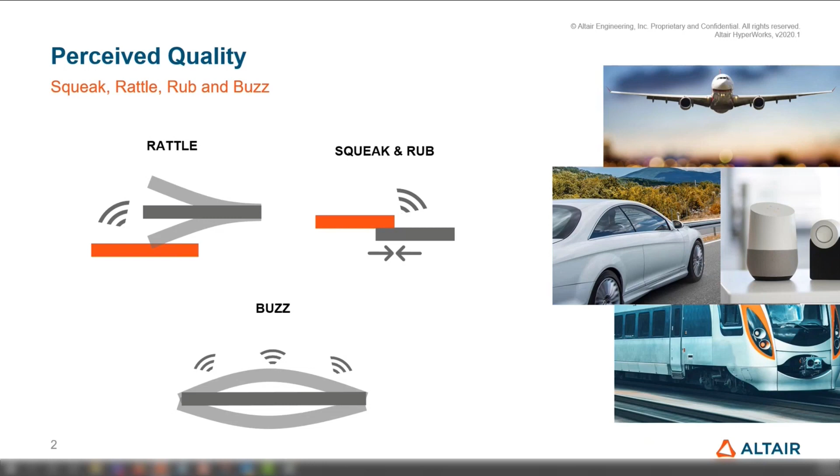Traditionally, these issues are fixed based on iterative physical testing, which is often done at later phases of product development. As you can imagine, it ends up in very expensive reworks and quick fixes at the production stage. Through simulation, we can eliminate most of these issues even before the first prototype is built. Altair's solution for this is well established and has over the years become industry standard for squeak and rattle simulation.

So squeak and rattle issues are, as we've seen, a responsibility of many at every stage of the vehicle or product development cycle, even at the early design stage. Here we provide the tools and technology for the first stakeholders, designers, allowing them to evaluate the risks quickly and iteratively. This is achieved using CAD-based simulation combined with a material compatibility analysis using the Ziegler stick-slip material database, which I'll get to a little bit more later in the presentation.

As soon as the first finite element model is available, we can then add on and perform a structural squeak and rattle risk analysis, which allows us to identify the issues utilizing solutions like SnRD, leveraging the industry standard E-line method.

Here we also leverage structural optimization in different ways throughout the entire development process to guide us in the right direction on how to actually solve the issues that we find.

One can also include variabilities in the model through a DOE and stochastic study, and this allows us to examine how the squeak and rattle risk will directly be affected by variations caused by manufacturing, external effects, or wear.

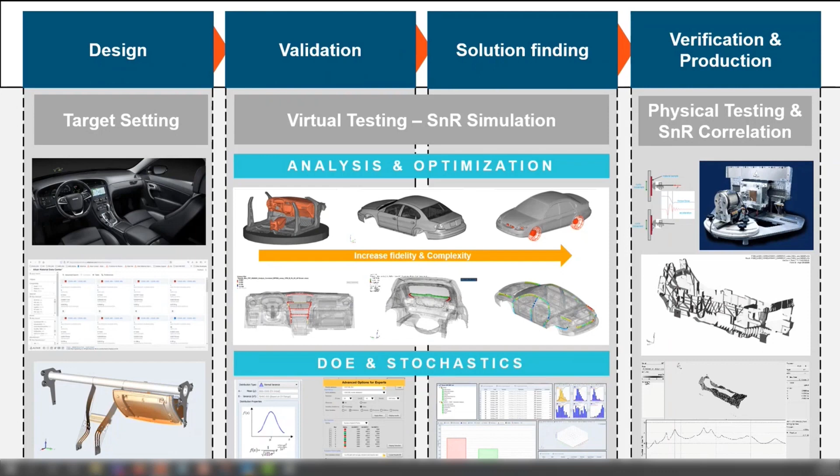One can also correlate with tests, with the main purpose of improving the quality of the virtual testing. Our solution is mainly about providing the simulation tools, but we can also at this stage help out with physical testing through our partners, which we've done in many projects.

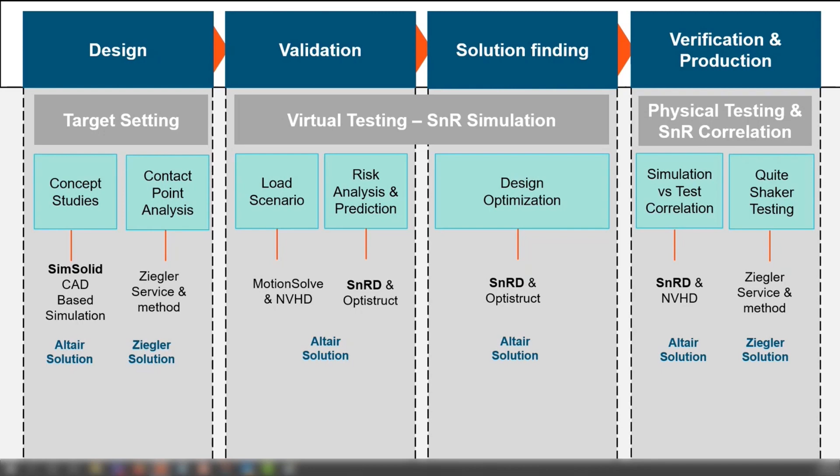So if you look at the entire solution, it's actually not only Squeak and Rattle director. It's built up of various Altair applications, including our partner Ziegler's methods. But a key component of it is, of course, the Squeak and Rattle director, which we're here for today, and the Ziegler PEM, or Ziegler stick-slip database, which is leveraged in different ways across all of the vehicle development process.

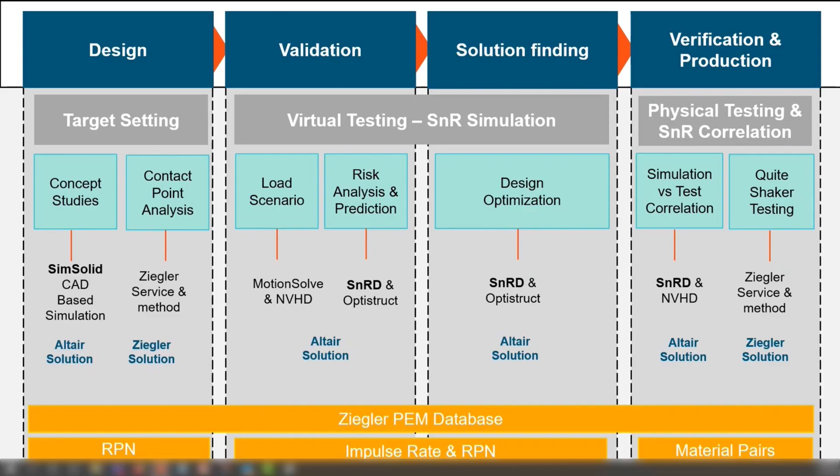The Ziegler material database provides over 11,000 test results from stick-slip tests performed by Ziegler instruments. With this data, one can easily compare and assess the compatibility of different materials through metrics such as the risk priority number and impulse rate. It is now available at the Altair Material Data Center, which I'll get to later.

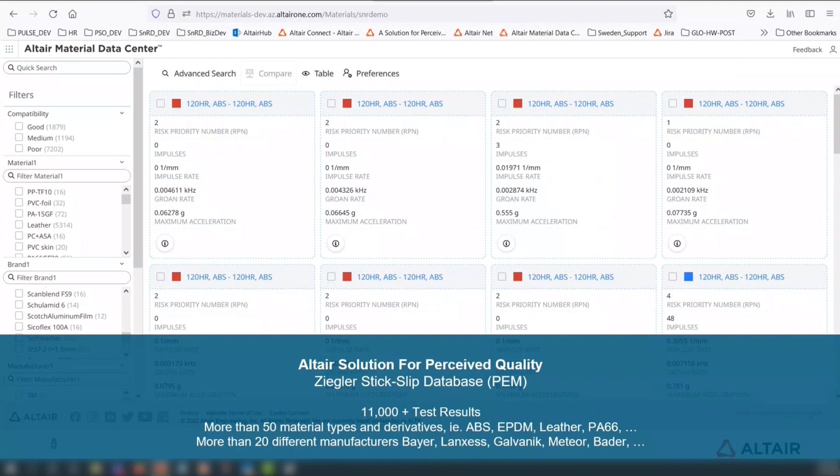We also have a direct integration of this database inside of Squeak and Rattle Director, as we need the impulse rate of a material pair, which we use as a criteria to evaluate the squeak risks.

The Squeak and Rattle director, for those of you who don't know, provides a streamlined, intuitive workflow to perform a squeak and rattle risk assessment, as well as providing more advanced diagnosis tools, which makes it easy to identify the root causes of the issues, as well as finding more optimal solutions to actually eliminate them.

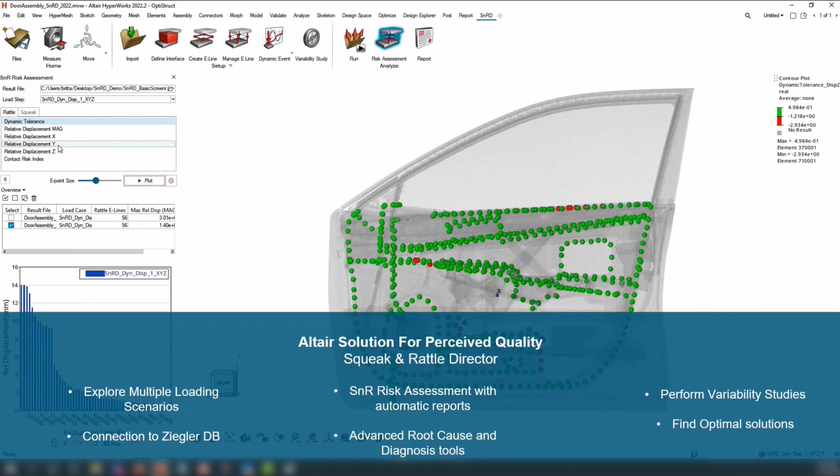But how does it work? What technologies do we use in Squeak and Rattle Director?

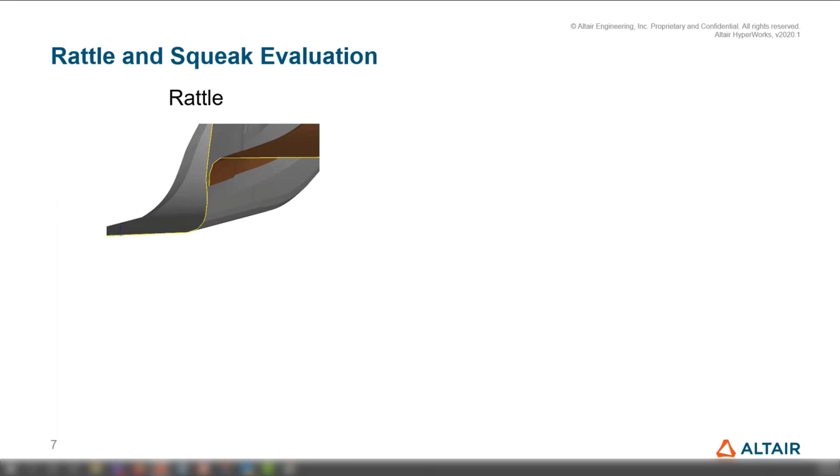To detect both Rattle and Squeak, to make it simple, we track the relative displacement in all directions between two components. For Rattle, we track the movement in the gap direction and compare it with the nominal gap, extracted from the drawings and GD&T data. If the relative displacement is higher than the gap, we know we have a risk, as you can see here.

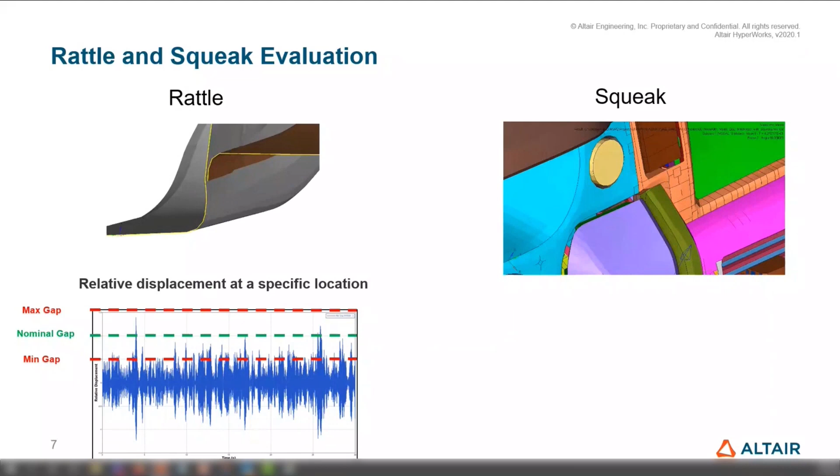A Squeak is an issue caused by friction. Here we track the movement in the contact plane, and the risk is evaluated based on the frictional parameters of the interface. This is where you can use the Ziegler stick-slip database.

So now that we know what it is, how do we access it? Since 2021, Squeak and Rattle Director has been integrated in HyperWorks, so no separate installer is needed. The Squeak and Rattle Director tab is disabled by default, so to access it you just enable the ribbon tab through the View dropdown. An additional license will be drawn when the SNRD ribbon is visualized and active, drawing an additional 19 units.

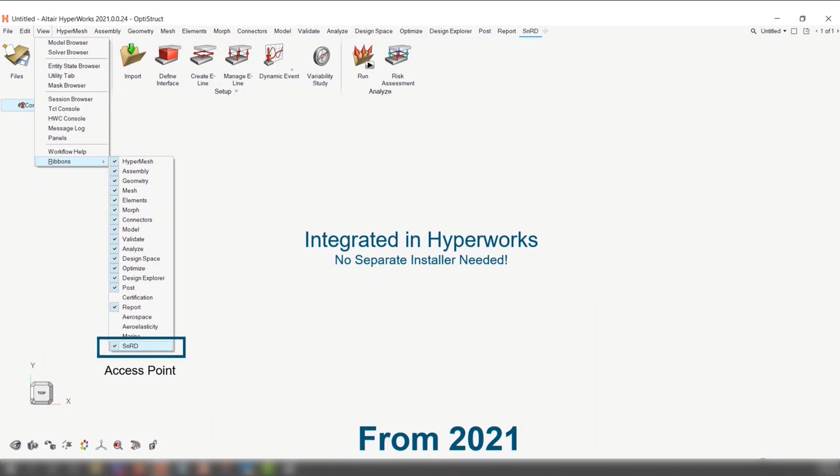The more advanced post-processing and diagnosis capabilities that I mentioned can also be accessed, and to access these you need to load through a sessions file. We are working on making this more easily accessible too.

So now over to the main event, which is the highlights for the latest 2022 release solution. I'll start with the most major one, I would say.

There has been a drastic need to improve performance of the creation of the E-lines that allow us to track the relative displacement, and this was especially true for large models. We've also gotten many requests to give more control over the actual realization of the E-lines to ensure they're created properly in all areas of interest.

Previously, as an example, when an E-line failed, one could not really see why it failed, and one could also not find a solution for it.

So here we leveraged core connector control functionality, which has allowed us to both drastically improve the performance—you can see we have up to, or even more sometimes, but for this example, a 5 times faster speed up. But it's also made the creation much more robust.

And the workflow, as you can see, has not changed much, but one can easily access the connector controls and modify the E-lines to ensure you get the behavior that you're after.

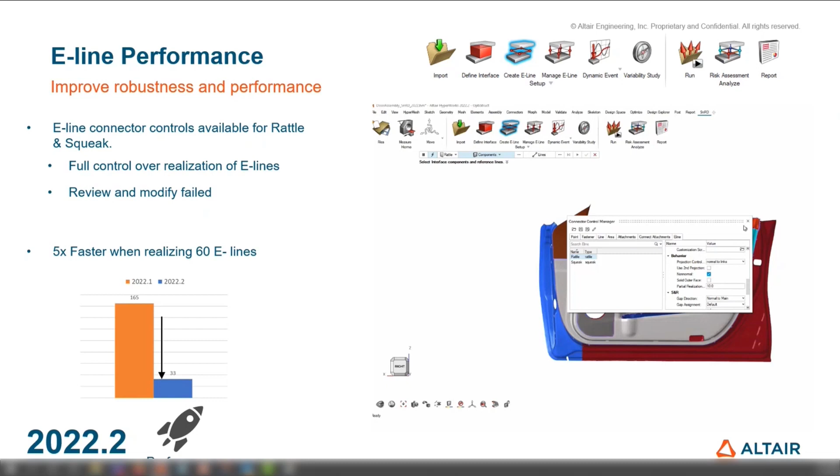We've also made some changes to the risk assessment, which allows you now to review the results directly on the model in HyperMesh.

This reduces a few steps, which sometimes are very time consuming, like having to reload the model. It also enables you to modify the model directly based on the results.

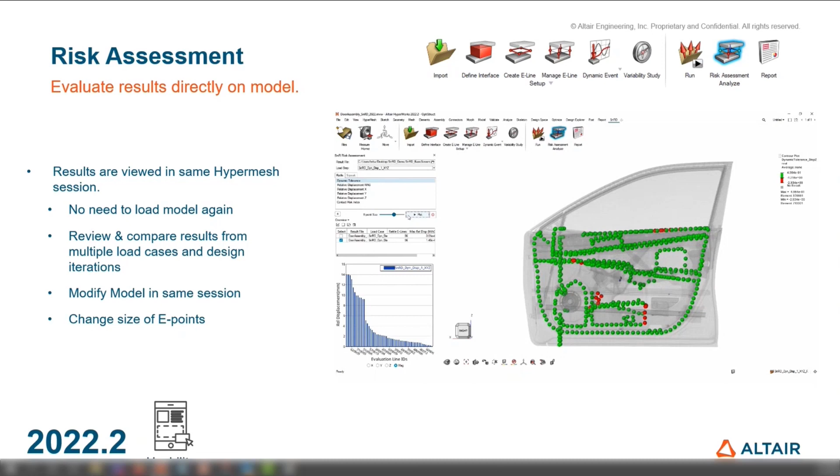One can still review and compare results from multiple load cases, as you can see here. But once you're done with your result evaluation, you basically just turn off the results so you can continue modifying the model. No need to work in different sessions as previously.

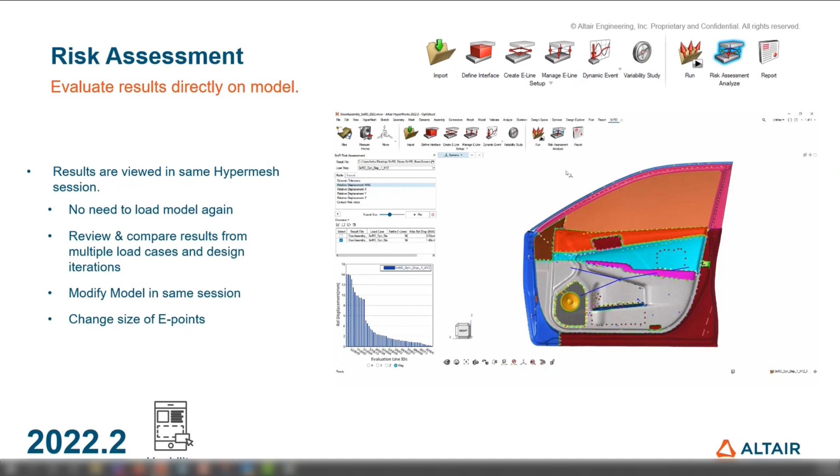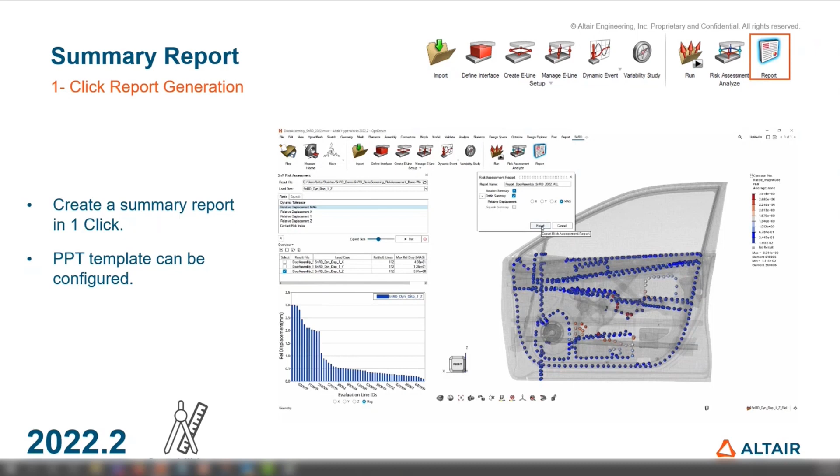So once you've reviewed your results in the risk assessment, you can now create a summary report in PowerPoint, which gives you an overview of all the results and all load cases active in the session, in just a single click.

And both the contents of the report as well as the template used to create it can be configured.

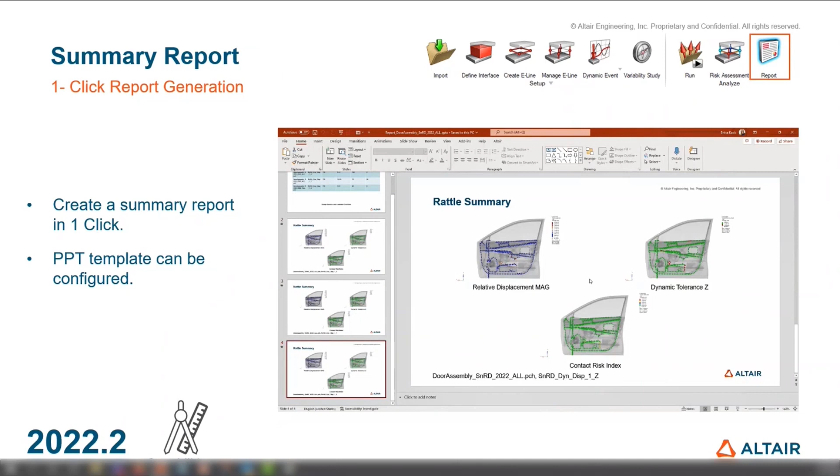Some very big news, which I mentioned previously, is that we have now fully migrated the Ziegler database to Altair Material Data Center, making it fully accessible in the cloud. This new interface offers much more flexibility, as one can now filter and sort on all available parameters, something which has been requested by most users.

It lets you perform the compatibility analysis much easier. So let's take a closer look at how this works.

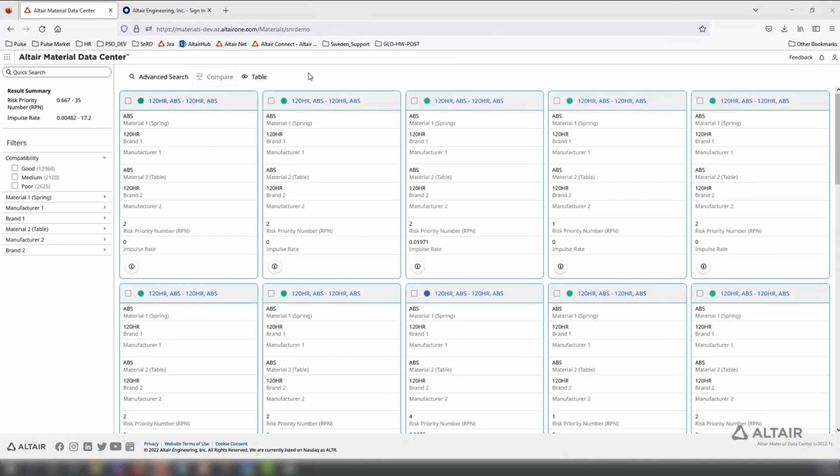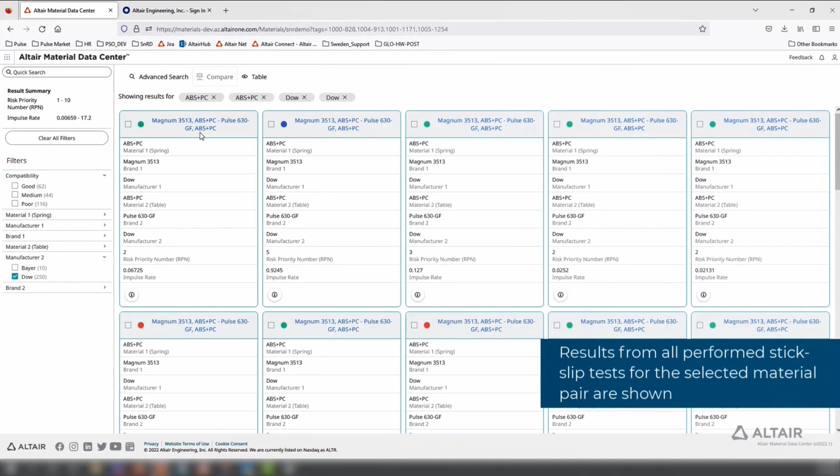So the database contains those 11,000 stick slip tests, as I mentioned. You start by selecting the materials that you want to include in your analysis or compatibility analysis. You can see that you can select both material, manufacturer, and brand here. And when you're selecting, it's filtered based on your selection.

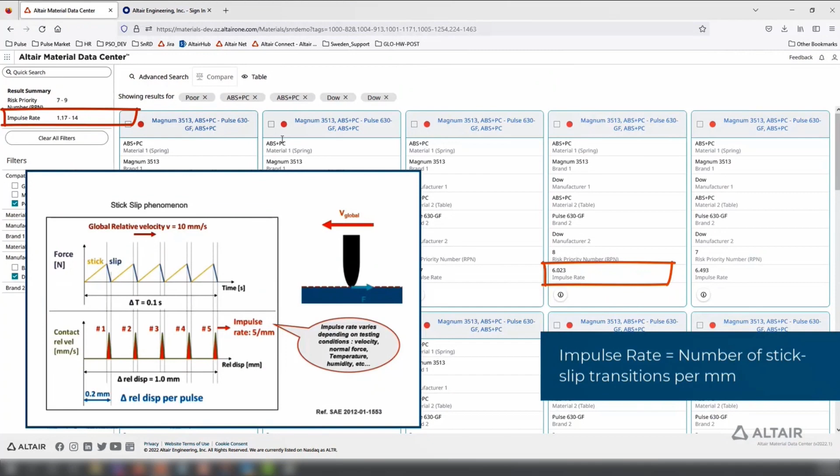The risk priority number is a criteria to show which material pair show a high risk for squeak for that specific test. So you can filter based off of this number to get an idea of how many tests are actually high risk. You can also look at the impulse rate, which gives you the number of stick slip transitions per millimeter, which is something we use directly in our Squeak and Rattle simulations.

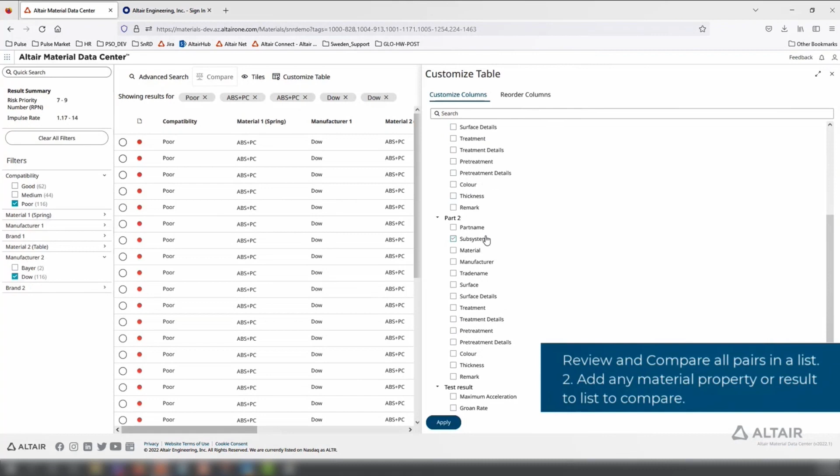And if you want more detailed information on every single test, what all the circumstances were and all the parameters, you have that available too. Reviewing all the material pairs list that you can customize makes it very, very flexible, and you can compare based off of all available parameters, and obviously sort on them too, if that's required.

So like I mentioned, this is now available on Altair Material Data Center. There is or will be an entry point from the starting page, and you will need AMDC licenses or full access to AMDC to be able to access this.

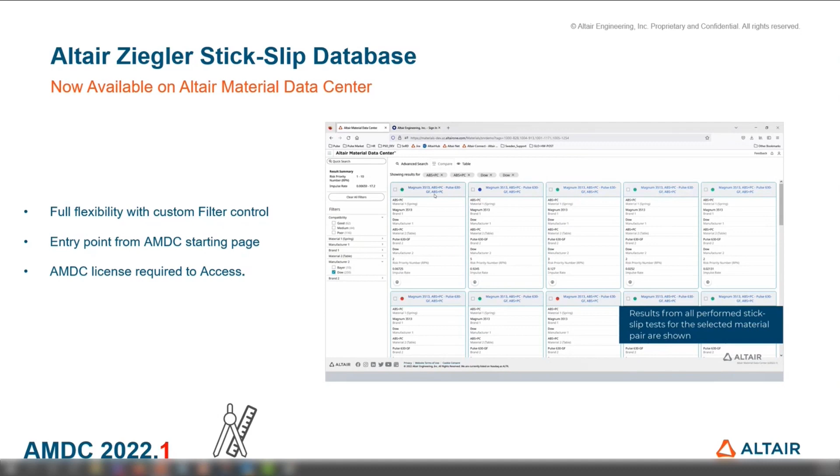Another very big exciting news is that we now have basically the first step towards being able to do CAD-based Squeak and Rattle prevention. SimSolid have introduced a new tool in the post-processing, which allows for tracking of relative displacement between two parts at multiple locations.

As of now, it only supports linear static, which allows you to evaluate load cases such as quality feel or leaning against headrest. But the plan is also to support modal transient load cases in the future. So let's take a look at this tool too.

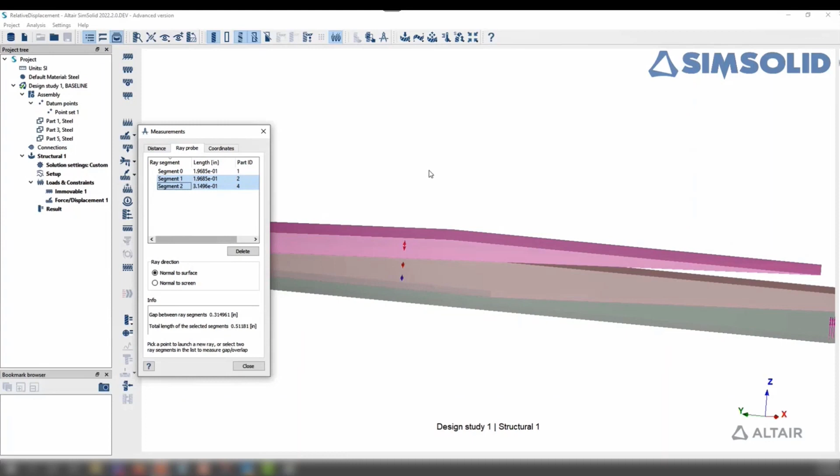So this simple model that you can see here, let's just review it first. It's being pulled up in the positive directions. Basically, all of these parts are being pulled apart. The plates, as you can see, are separated with an initial gap, which is automatically extracted from the model, which is one of the main benefits of working directly on CAD instead of FE.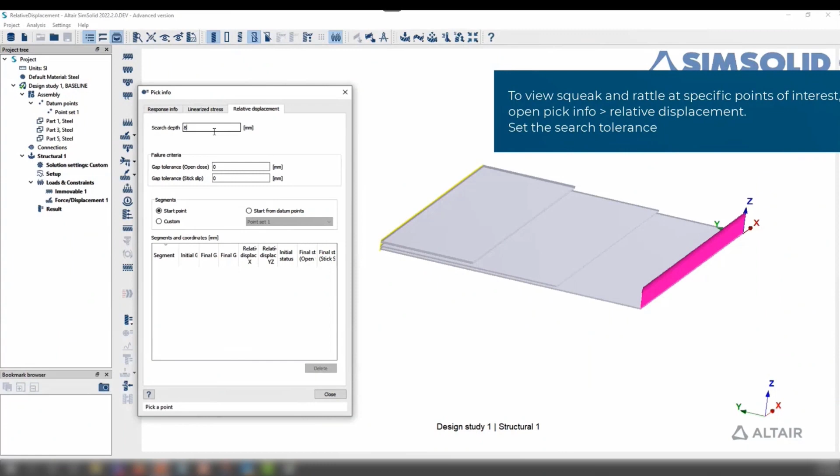After reviewing the static analysis results here, we want to see which potential areas now show a risk for squeak and rattle. So we go to the pick info and the relative displacement tab. This is a new tab, and here you can pick any point to see the final status of it.

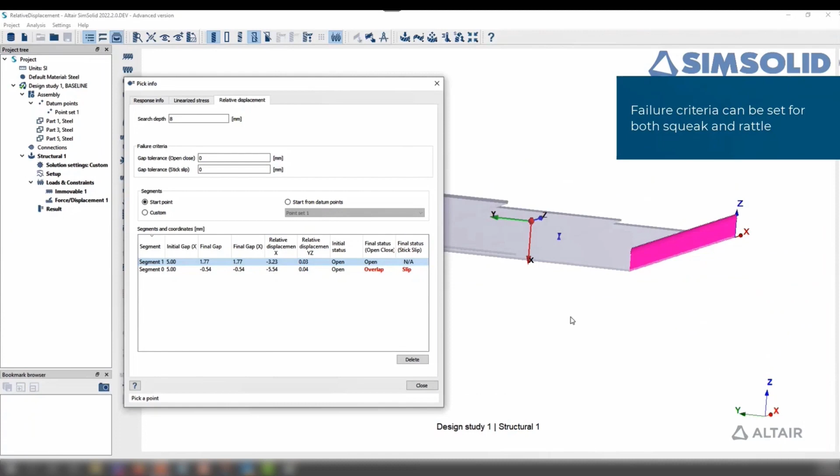So it allows you to see the relative displacement in the gap direction, as well as in the plane. But it also lets you see if the relative displacement caused the gap to close or not. So you can see final status: open, close, overlap there. And you can also see if it actually showed a risk for Rattle or Squeak here.

And these evaluation criteria that you can see, the final status of open, close, or stick slip, are all based on the failure criteria, which you can modify. So points of interest can be selected manually or directly from these predefined datum points. And these datum points can easily be imported from a CSV file, so in bulk, if you already have coordinates of all the areas that you want to investigate.

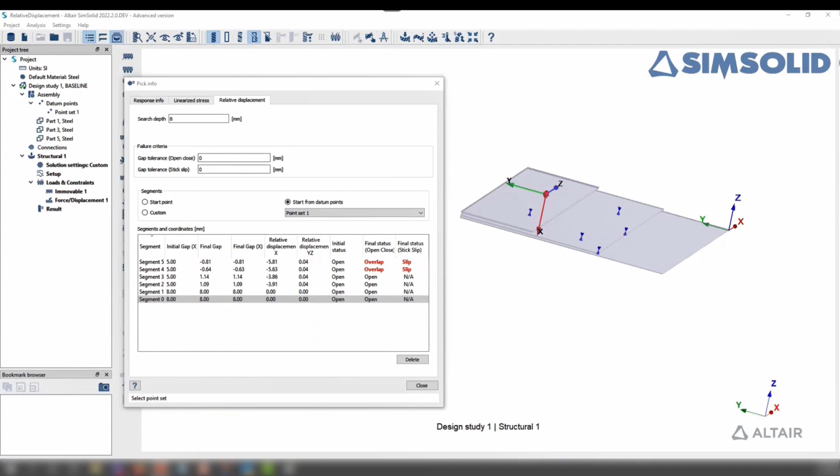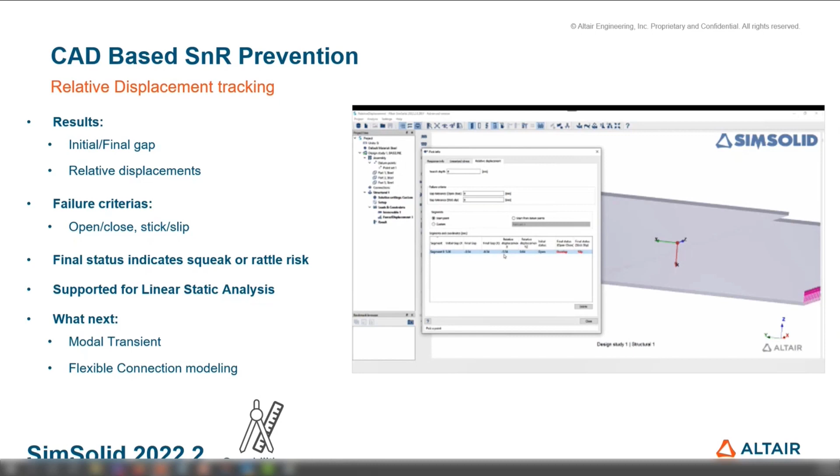So with that, I conclude all of these brand new features and functionalities. And just to finish off, for everyone who is already working with Squeak and Rattle Director, I highly encourage you now to move over to this latest release, mainly because of the major performance improvements that we've done. It's going to save you a lot of time.